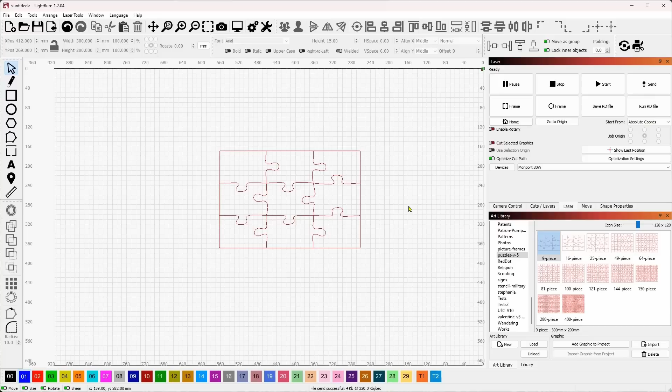This kerf in here is going to be the size of your laser beam no matter what you do. You only have one laser beam, you can't change it in the software. Let me demonstrate what kerf really is. Let me come down here to my Valentine hearts and take this heart and make it, yeah, 2 inches is good.

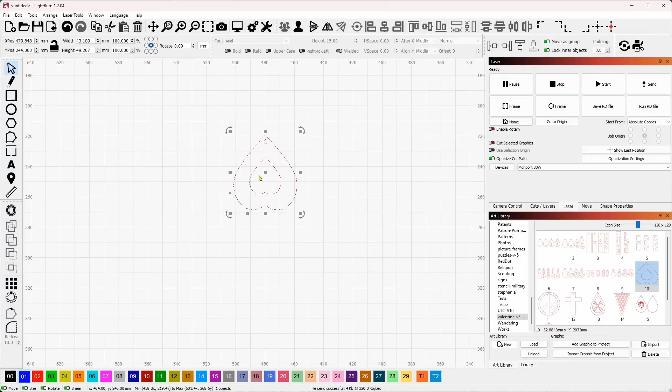So what the kerf is: let's say that you have a piece like this, an earring. Let's ungroup this, duplicate this one and move this one off to the side. You want to cut this out, and then cut this out of another material. Let's say you cut this out of red and this out of black material, but you want this piece to fit inside here after it's cut. That's what the kerf is about.

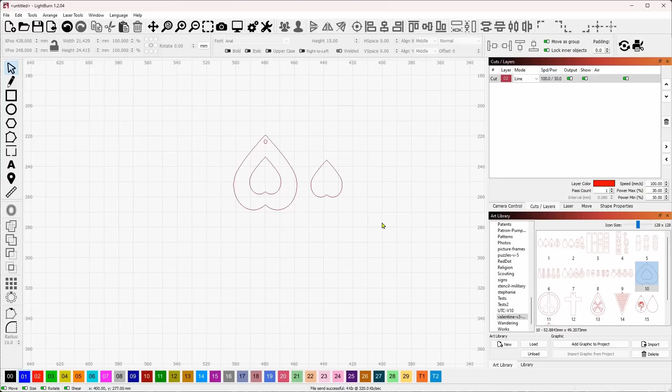Now I'm going to use a dramatic kerf for this demonstration because I'm using some 3/16 inch polystyrene foam board. This is my prototyping material. My kerf is going to be a lot larger on this because it's going to melt away a bunch of that material. So I'm going to put this one on another layer. Now we've got this on the blue, and I've got the right speed and power. Because it's polystyrene foam board, I'm going to do a 1 millimeter outward kerf.

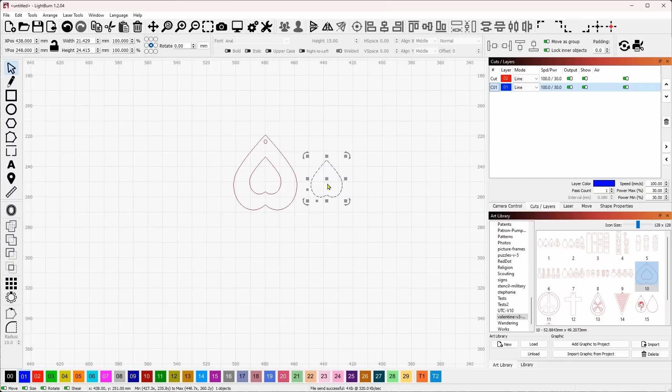What that just did was make this piece larger so that it will fit inside this hole that's being cut out. You could do the same thing up here just by locking this and making it 1 millimeter larger. But this is how you would do it in the software, and typically I'm going to be over here on my kerf offset.

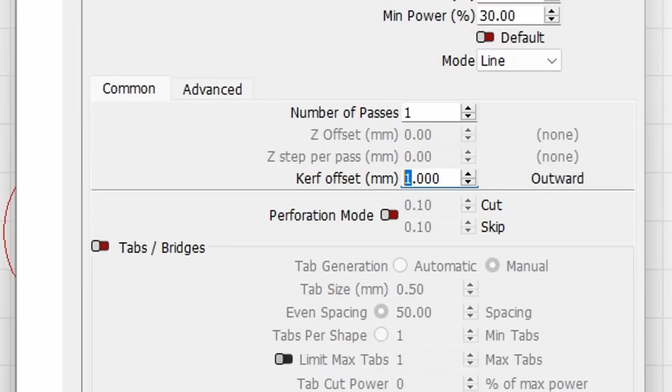If I were doing this out of acrylic on this machine, I would be 0.05. That's how much bigger I need to make it for the acrylic to fit, because the acrylic is not going to vaporize like the polystyrene will. But I know that on my prototyping material, this foam board, it's a 1 millimeter kerf offset. So I'm going to set that to 1 millimeter, say OK, and we're actually going to run this job now.

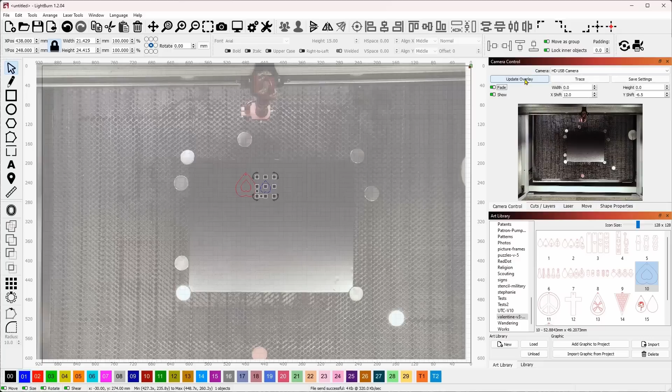I've got the Monport 80 watt fired up and a piece of my polystyrene down on the workbed. Let me take a look at where it's at. I don't want to waste too much material, so I'll move that up there, and move this guy up close like that, and that looks pretty good. I can turn off the camera now.

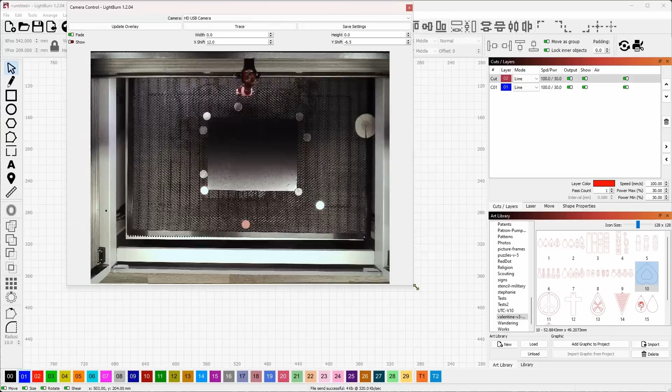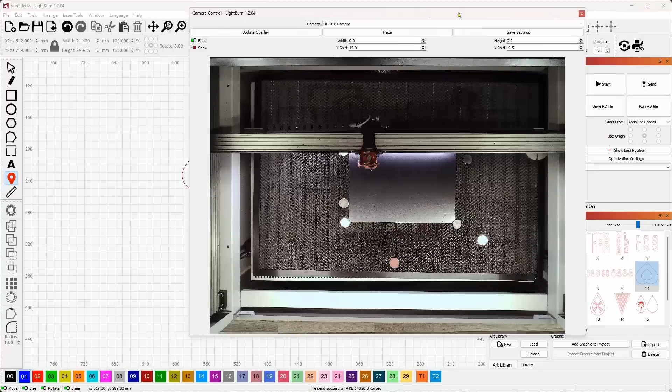I know it's in the right spot. I'll run this job and then go over to the camera and show you how these two pieces fit together. Let me do a quick frame to make sure everything is okay, and that looks fine. One thing I did forget to do was focus the laser, so I'll come to the move tab and hit the focus. And there we go. It is ready to run this job. I'm just going to hit the start button.

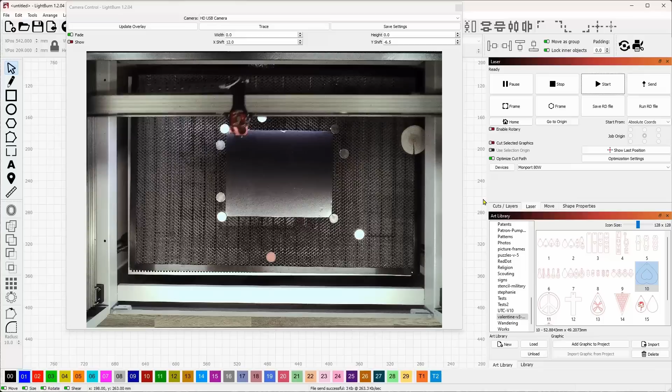And there are my two pieces. Let me move the laser head out of the way. And now I'm going to walk over and show you how these fit together.

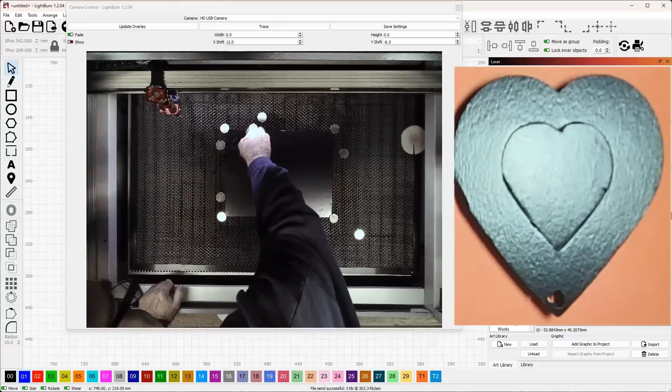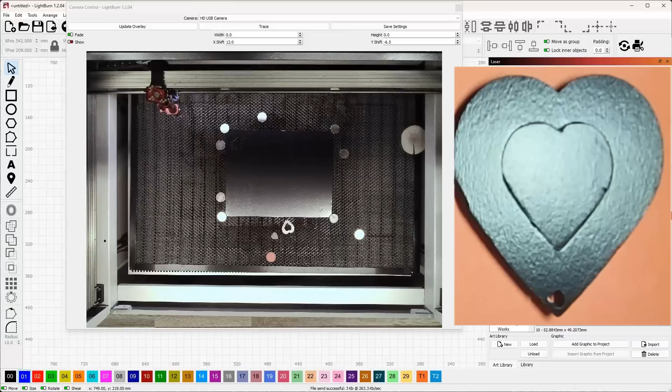So there you see that was a perfect fit. Didn't need to do anything other than put them together, give it a little squeeze, it went together. When I dropped it, they fell apart. But like I said, if this were being done on a piece of acrylic, the kerf would be much, much smaller because it's not vaporizing the foam board.

And now just to give you an example of how this would be without the kerf, let me go ahead and reposition this work so I can run one more job without it. And we'll take and move both of these off just a bit. That looks pretty good right there.

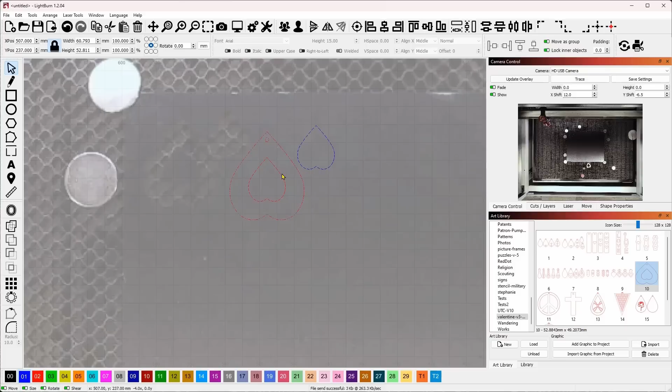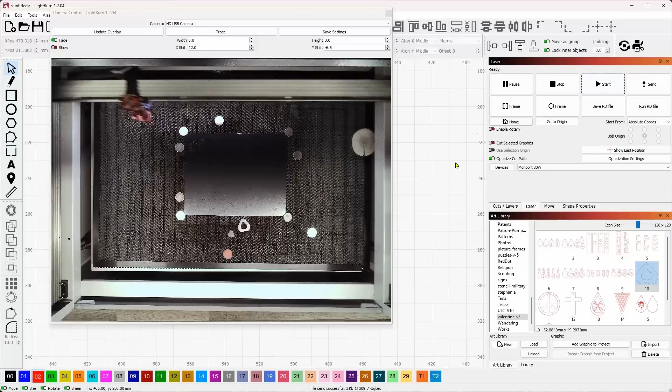So now I'm going to run this job again, but I'm going to change the kerf offset to 0. And actually I don't even need to do that. What I can do is just put this on the red layer, and we'll come back over to the laser, and I will run this job one more time. Okay, move the laser out of the way. Now I'll go pick up these and I'll show you the difference.

All right, so let's get away from the prototype material and let me show you the practical daily use for something like this. So I guess we'll make a 2-inch peace sign earring. That looks pretty good like that. And what I'm going to do now is, this will be a cutout out of black acrylic, and then I will cut out these inner pieces out of yellow acrylic, and we'll put them together. This is good just the way it is.

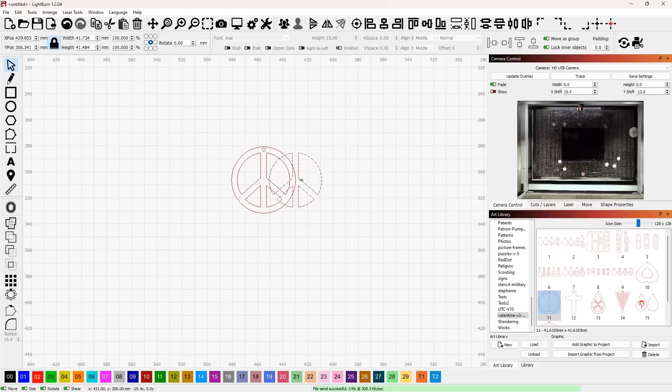And then what we want to do is grab just these inner pieces. Let me ungroup it first. We'll grab just these inner pieces, press Ctrl and D to duplicate them and pull them off. So this will be our first cut right here on the black, and this will be our second cut here on the yellow. For right now, I'm just going to go ahead and delete this section that I just did here, because I can always undo the delete. I already have that saved now to my clipboard, so it's like copying it.

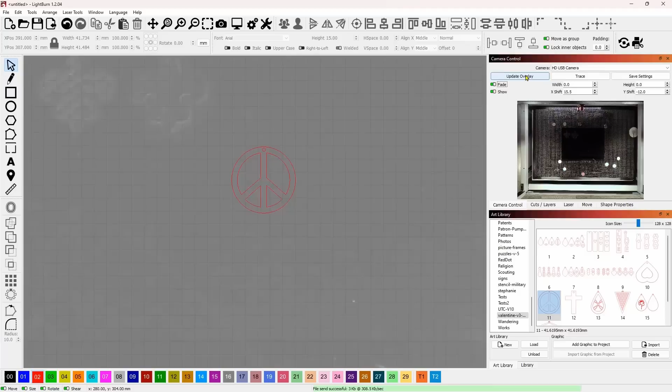So now let's go ahead and update the overlay and see where we're at. I have a piece of black 3mm acrylic on there now, so I'll get it into a spot where I think is good, and I think that's good right there. And actually, you know what? Let's go ahead and do that. We can do both at the same time. So let me undo all of this.

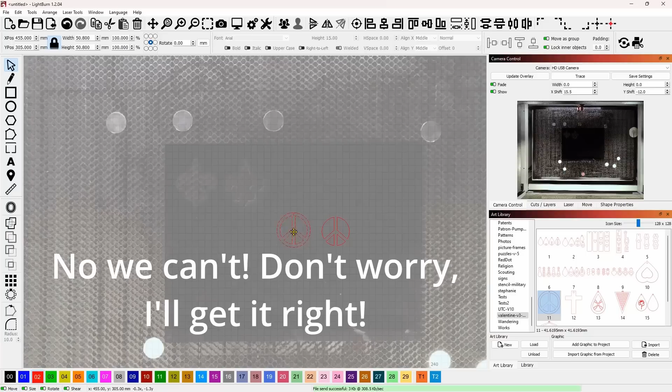I will take this guy and put it right here, and I'll take this guy and put him right there. And now we have our two pieces, and we'll put him on the blue layer like that. So now we have two separate layers. I'm going to come to my cuts and layers. The red one's going to cut first, the blue one's going to cut second, and we don't really need to see the camera anymore.

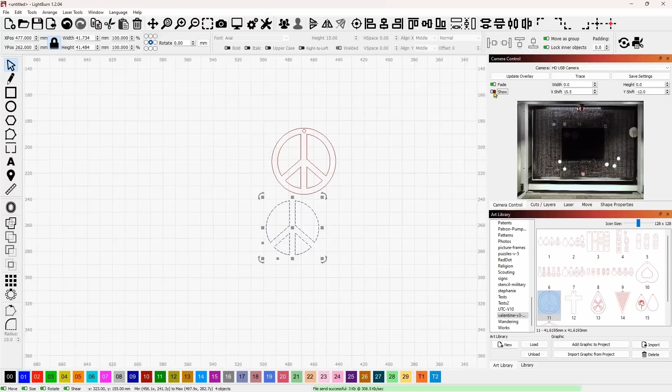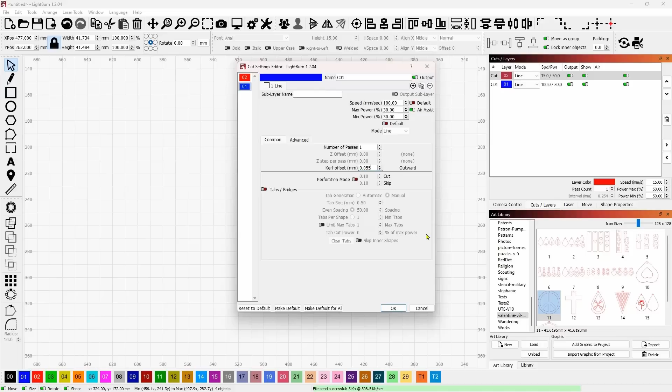So now on this one, it's 3mm acrylic. On this Monport 80 watt, 15 and 50 is good for that. So there will be a 0 kerf offset on the red layer, and then on the blue layer I already know that my kerf offset is 0.055. I say 0.05, but it's actually 0.055, and we just need to assign the speed to it. So I'll jump to my library, 3mm cut, blue line, assign, and now we're good at 15/50.

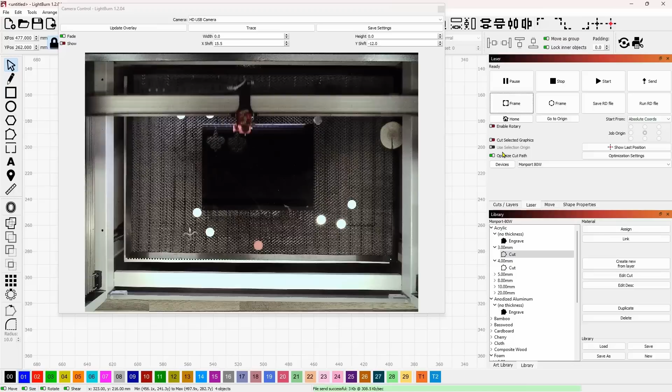I'll bring the camera out so that we can see this, make it bigger, and we can come to the laser and frame this job. As you can see, I really don't need the frame because I'm using the camera. So we will go ahead and just run this job, and I will just make sure by coming back in here that I did do the kerf offset, and you see that it did not offset because I made some changes when I assigned it to the layer. So I'm happy that I came back in here and checked it.

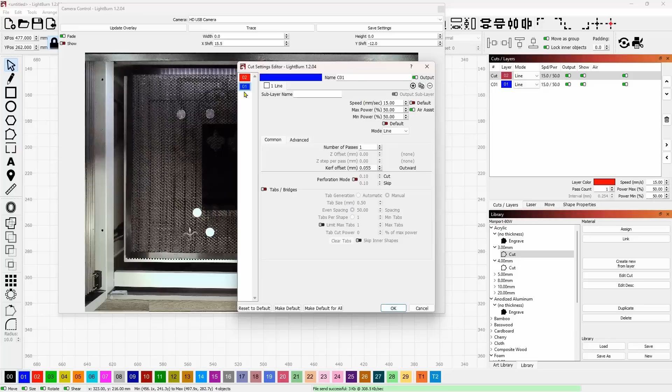So that's one thing you always want to do right before you run the job. Make sure, in case there have been any changes. When I assigned the cut layer, it took away the kerf offset. So I'm glad that I checked that. So now we have the 0.055 on the blue, and we're ready to come to the laser and hit the start button.

So we'll let that run, and I think my settings are a little bit too high on this. I need to tweak this library a little bit. The power is a little too high for 3mm acrylic, but it's okay. It doesn't really matter much.

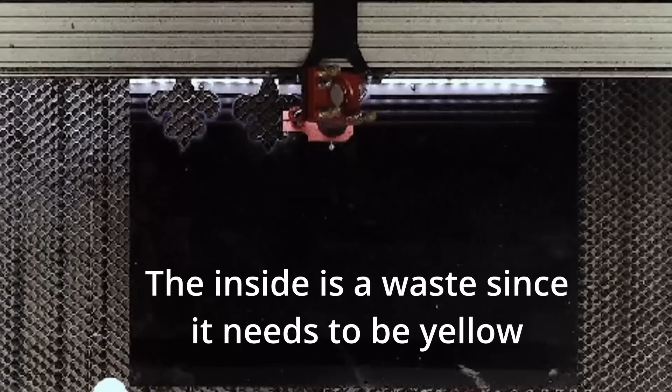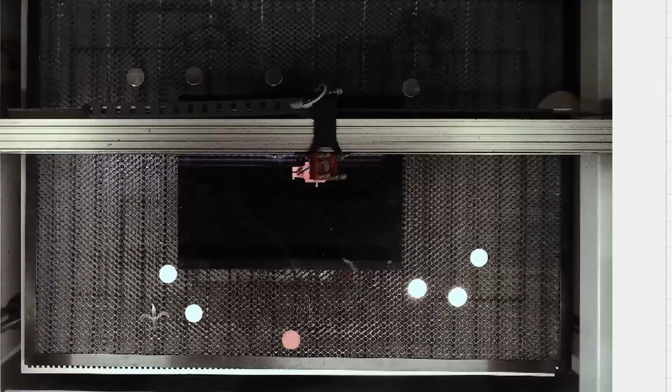So we're almost done with the first one there. It's finishing the outside cut. And now we're doing the inside cut with the kerf offset on the second part of it. And it's just about done, and we can now go and take this off the laser. And let me move the head out of the way. I'll go take this off the laser and show you in real time what we've got.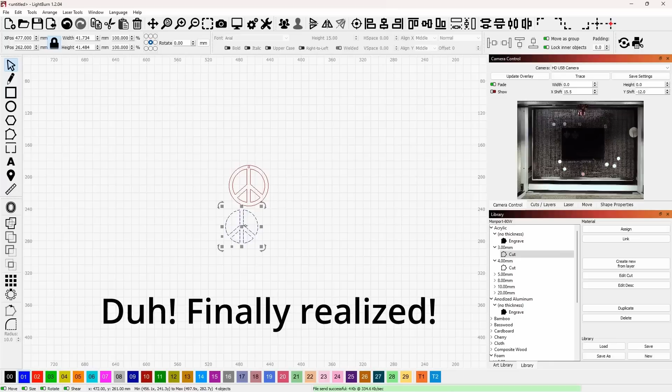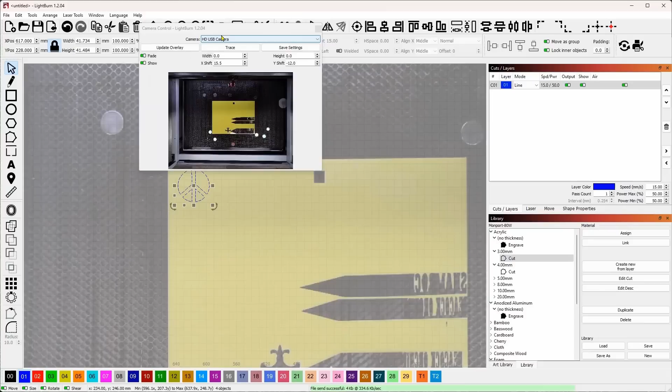Oh, you know what? I shouldn't have done this one over here, because I wanted to do that one out of the yellow. Well, these are the mistakes that you get when it's in live time. We'll run this job again with the yellow one next. All right, that was my mistake with the yellow one. So we'll update this overlay real quickly. I'm just going to do this one very quickly. Move this off up here, and we'll come to the laser tab, and we will run this job.

And now you'll see it's cutting out the inner parts.

Hey, this is what happens when you get old, you know. You make all these kinds of mistakes without thinking, so it's okay. It's not a big deal.

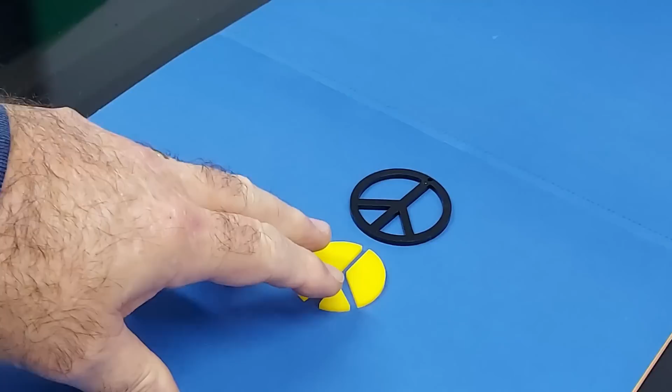So now we can get this camera back out of the way and move the laser out of the way. And I'll go get those parts, and we'll switch over to a live video so you can see the assembly. Okay, so this is what I've got off of the laser. Now, when you take these pieces off, you want to keep them in the same orientation that they came off, just exactly the way that they were cut.

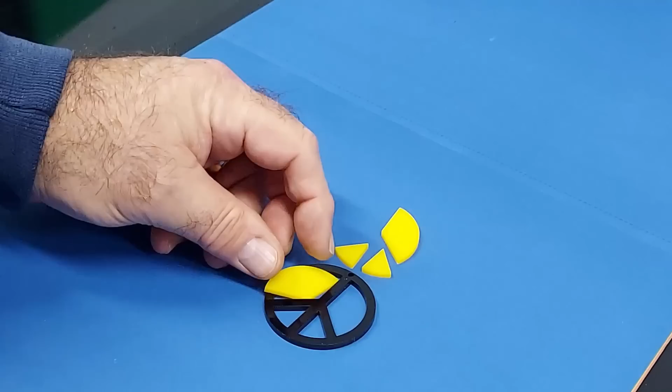So I'm going to take my black main piece here, and I'm going to start fitting these pieces in, and you'll see that they sort of fit, but you have to push them into place. And you heard that snap in? And sometimes with the smaller pieces, they might be a little bit harder to snap in, and they have to be perfectly level.

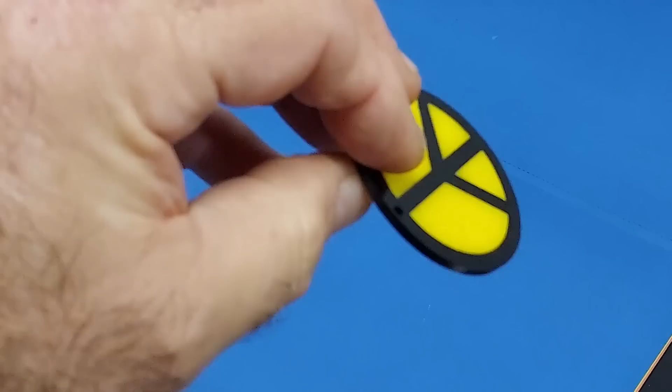But here is our final product, and you pretty much don't need glue or anything else. If you get the right kerf offset, you can practice with this, make a few pieces, but this particular one right here doesn't need any glue at all. Everything's snapped into place, and this is ready to wear. We can put an earring on it and go. So there you go. A perfect cutout. You don't need any glue or anything like that.

For safe measure, if you wanted to, you could glue the edges before you snap them together. I find glue messy, so I'd rather use the kerf offset and then just put some extra pressure on it to get it in place. And it's not coming out, so that's a permanent earring now. All right, so there you go. Job done. Now, let's talk for a minute about the kerf and the offset.

The larger outward you go, the more tightly it's going to fit. You won't need any glue. You can just pressure fit them. I do it on a flat, solid surface. Try and get it as even as I can and push down on it, and then just push down hard and it snaps into place. And that's the best way to do it.

So the misconception that most people have is that it does something to the laser when you set the kerf offset. It doesn't. All you're doing really is making the second piece larger, and it's just that simple. So that's what the kerf offset is. And I know a lot of people think that it changes the laser, but it doesn't. So the things to keep in mind when you're doing your kerf offset is like anything else. It doesn't matter what you're doing.